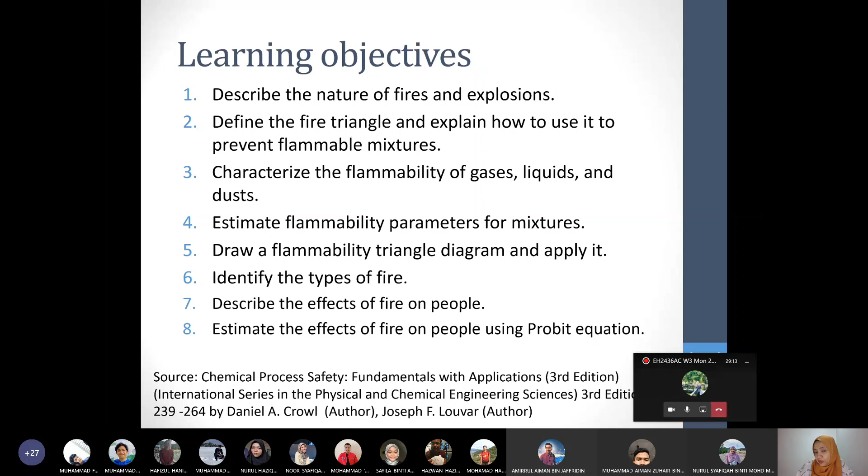We've seen these 3 most common chemical plant accidents: fires, explosions, and toxic release. Toxic release is like the one in Bhopal or Chernobyl. We will be focusing on fires and explosions in this topic, and we've also seen the impacts they can bring to people, properties, the environment, as well as to the business itself. So it impacts all of this.

I want to start with one example, which we can also relate to the domino theory we learned in theories of accident causation. The story about Mumbai High North is that this oil platform, the whole thing was gone in 2 hours. This explosion and fire destroyed the whole platform so quickly. The main reason it all started was a cook in the kitchen on the vessel, not even on the platform.

On the ship, which is a multi-purpose support vessel, there are kitchens. The cook cut 2 of his fingers and needed medical attention, so he had to go back to the platform and be transferred from the vessel by basket transfer. Somehow that ship hit the risers, causing gas leakage, which finally exploded, and the whole platform was lost.

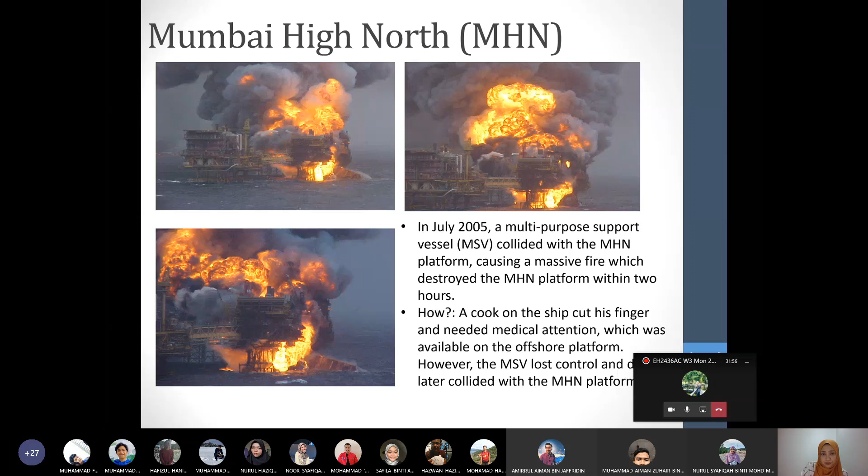This is why it's important for engineers to be equipped with knowledge about fires and explosions. To prevent accidents resulting from these kinds of fires and explosions, you must know the properties of materials. We handle flammable materials such as methane, ethane, butane, all the hydrocarbons, all the alcohols, and other petrochemicals. Those are all flammable, so you need to know the property of the material, such as the flash point, the ignition point and vapor pressure.

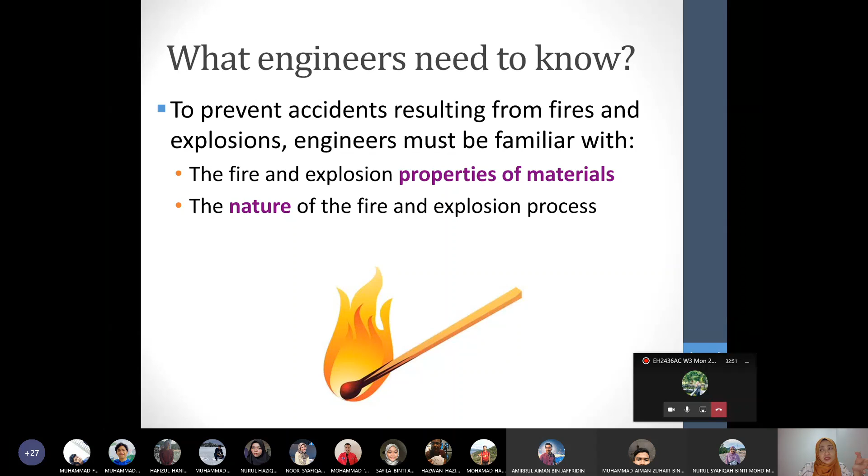Those things are important, and you also need to know the nature of the fire explosion process - how does a fire start, what makes up a fire. It is also important to know how to reduce hazards related to fire and explosion, how to handle or control fire-related accidents by following procedures to reduce hazards.

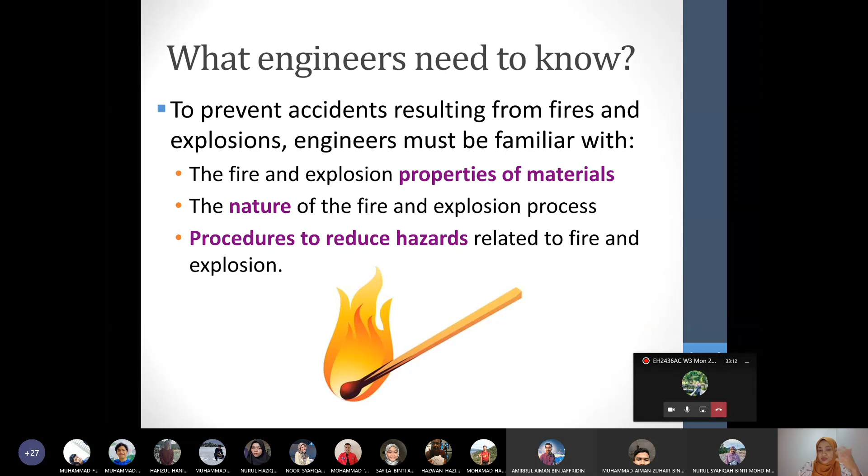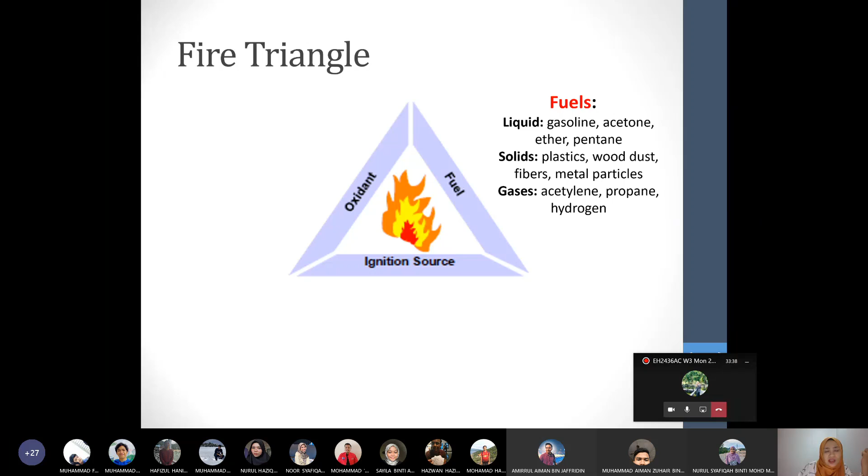Okay, so let's talk about the fire triangle. Now the fire triangle explains that there are 3 elements that must be present in order for fire to occur. So first of all, for you to have fire, you need to have fuel, right? So without fuel, how can you have fire? So you need to have some kind of fuel. It's either a liquid fuel, solid fuel, or gases.

So liquid fuels are like all those hydrocarbons or alcohols, or acetones. Okay. And then there's also solid fuels. Solid fuels can be anything that's flammable. It can be even the table, what we call a wooden table. It can be plastic. Some plastics are flammable. It can even be dust, wood dust, milk powder, even flour. Those are all combustibles. Okay?

Fibers, cloth, metal particles, even those are all flammable. And then gases, yes, gases are also flammable. Acetylene, propane, hydrogen. And then if you only have fuel by itself, safely contained in a container, you won't have any fire. I mean, you cannot ignite any kind of fire from it.

So you need to have an oxidizer, because we know that in order for you to make fire, you need to have a gas such as oxygen. So you blow when you're starting a campfire, right? You need to have enough oxygen for it to start burning. So other gases are also oxidizers such as fluorine and chlorine, and some oxidizers can be liquids like hydrogen peroxide, nitric acid, perchloric acid, and even solids such as metal peroxides and ammonium nitrite.

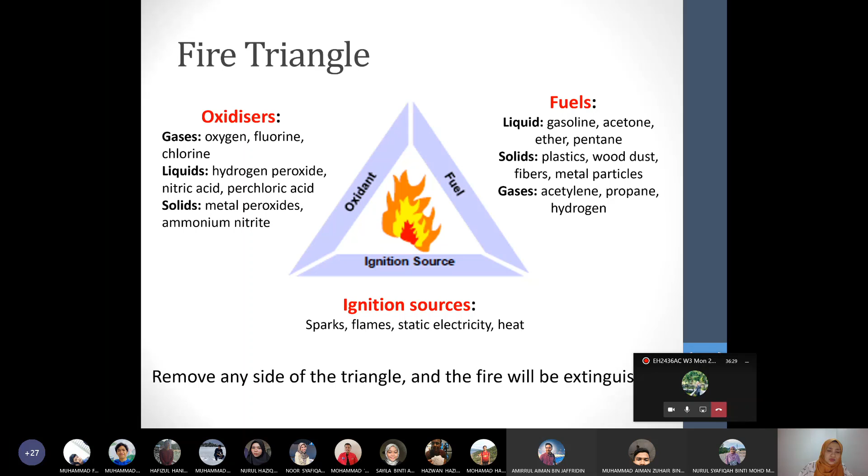So now we know that we have all these elements, right? So in order for you to extinguish a fire, you just have to remove one of the elements. Okay? So you won't have any fire if, for example, you remove the fuel. So you don't have any fuel present, or the fuel is just not in sufficient quantities. You have very little fuel, then you won't have fire. Or you can remove the oxidizer, or it's just that the oxygen is not sufficient enough.

This is like when something's on fire, you put a blanket on it. That's a way of removing the oxygen from that source of fire so that it can be put out or extinguished. And if an ignition source is not energetic enough to initiate the fire, then you won't have any fire, say, the heat is just not high enough, or the spark is just too small, and so on. Okay, so these 3 elements work together. Without one of them, you won't start a fire.

Okay, so that's fire. Now, what about combustion? So combustion really is a chemical reaction in which you have a substance, which is your fuel, and then you combine it with an oxidant, and then you have heat released. So when you have heat released in a chemical reaction, that means it's an exothermic oxidation, and a typical combustion equation would be a fuel or a hydrocarbon plus oxygen.

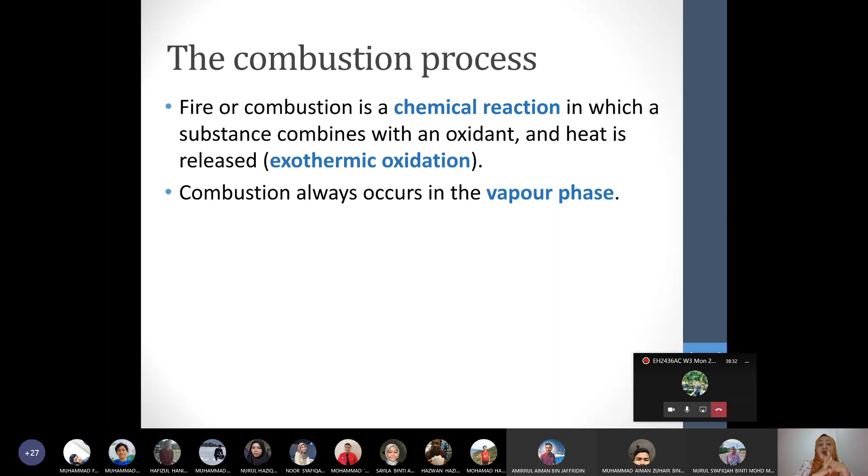In a perfect combustion with enough oxygen, normally you would have CO2, right? And water, if you still remember your combustion equation. So that's what you get. So it's a chemical reaction. Another thing that's important for you to understand is combustion always occurs in the vapor phase. It's always in the vapor phase.

If not, it won't occur. Okay, so this is because when you heat something up, let's say you heat up a flammable liquid, that liquid will volatilize, so it becomes a vapor. It is now in a vapor phase. Or if you burn a solid fuel, for example, that solid fuel decomposes and it also turns into vapor. So you see, it's always in a vapor phase.

So when the concentration of that vapor phase is high enough, that vapor becomes a flammable mixture when mixed with enough oxidant, with the oxygen in the air. Okay. So this flammable mixture already has 2 components. It has the fuel in the vapor phase in the right concentration. It has oxygen also in that vapor phase in the right amount. You just have to add an ignition point. You just put a spark, for example, and the combustion will start.

So that's how you start a fire. So you need to have those 3 elements. One is the fuel in the vapor phase, and then it's mixed with enough oxygen. Together it becomes a flammable mixture, and then just add an ignition point, and you start the fire.

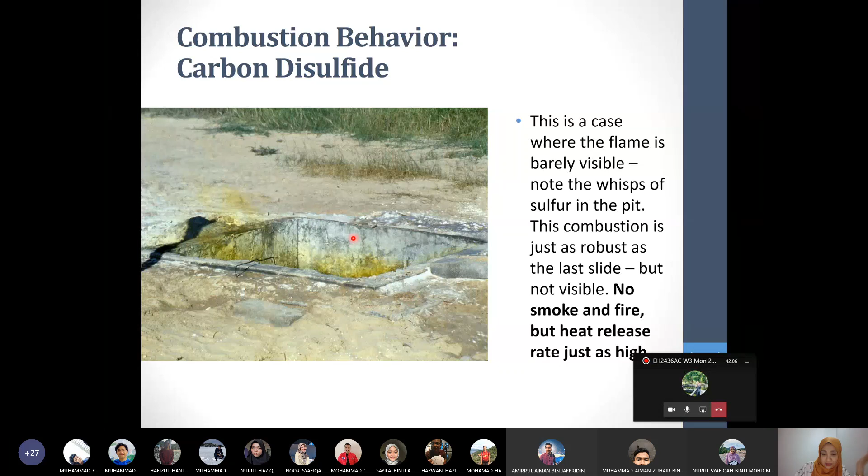Okay. This combustion is just as intense, just as robust as the previous hydrocarbon combustion. It's just that it's not visible to the eyes. You don't see the fire, you don't see any smoke. Okay? But the amount of heat being released from the exothermic reaction is just as high as the typical hydrocarbon combustion.

All right, another type of combustion behavior is this example. Let's say you have methane burning within a vessel. You have a closed vessel, this one is a dust filter unit. Okay? So it's in a covered vessel burning the dust, and due to pressure buildup, it starts to shoot out of the building. It looks for the weak spots in the structure, and you have this projection of fire going out of that containment unit or tank.

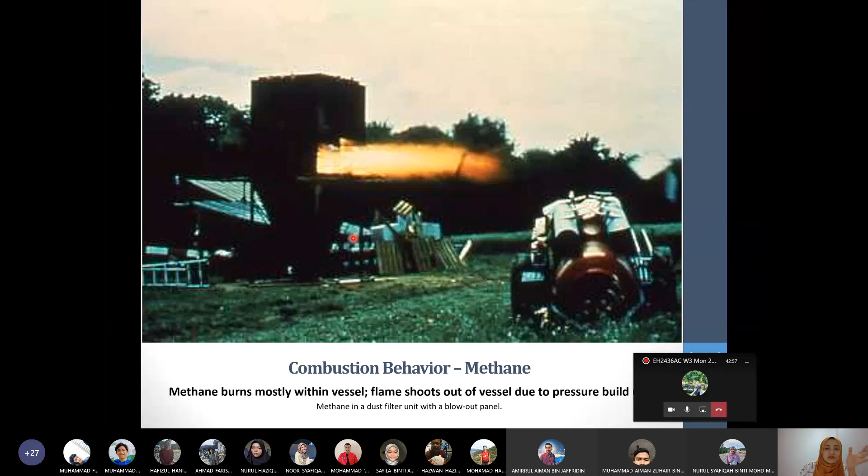Okay? So this is one behavior of combustion where you have this jet-like propulsion of fire going out of the source. And another behavior of combustion: again, you can have a combustion in air with dust. This is in the air. It's just like the previous slide where you have combustion going on in this vessel. I think this looks like a cyclone. If you remember what a cyclone does, it removes the dust particles.

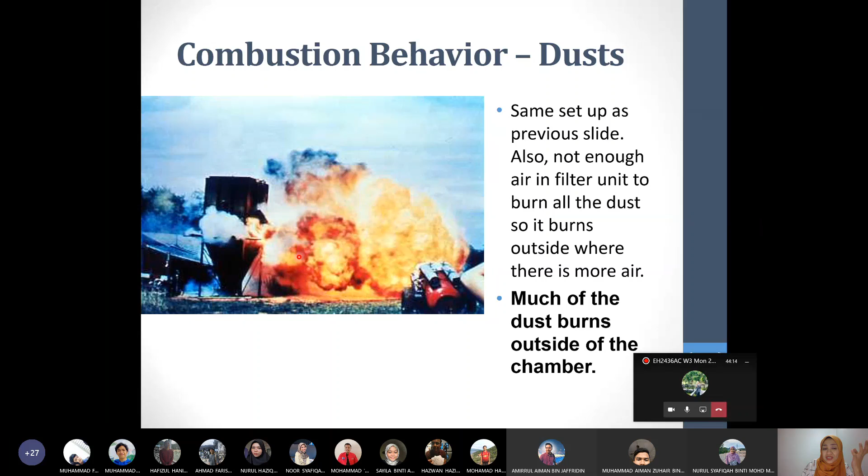So the combustion probably started inside the cyclone, and due to the lack of oxygen, but the fire still being intense, it's trying to look for oxygen. So it escaped this vessel and tries to find the oxygen outside of that vessel. So it's now burning outside because there's more air. Okay? But much of the dust is burning outside of the chamber. It's just that the explosion or fire continued outside of this vessel because it can find enough air. And so this is the behavior of fire, because fires move.

Okay, so I've been talking about fires and explosions. What's really the difference between fires and explosions? We always say that fire is a friend, right? We need fire. We need it to cook. We need it for heat. As long as we can control that fire, it's beneficial to us. If the fire becomes uncontrollable, then you can have an explosion. So you see, the difference is how you control something.

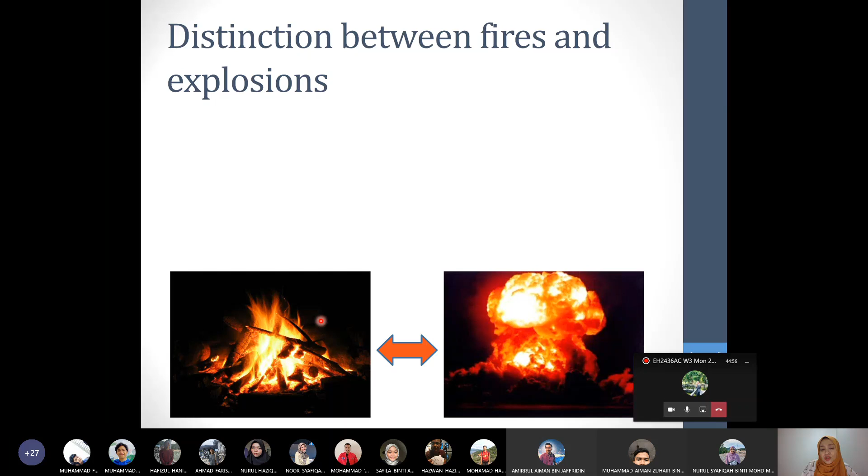What is it? You control the reaction. You control the amount of heat that's released. So you see, the major distinction is the rate of the energy release. For fires, it can take a while for a fire to start. But an explosion can start in seconds, even microseconds. Okay. So fire releases energy slowly, whereas an explosion releases energy rapidly, in the order of microseconds. It's just like that, you can have a fire.

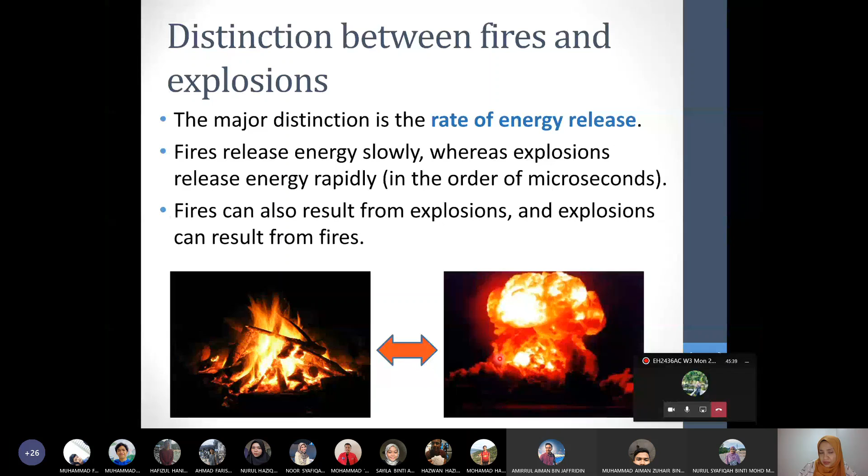And then fires can also result from explosions, and explosion can result from fire. So there, see, if you can control it, it can go back to fire, or if it is uncontrollable, it explodes.

So now let's look at some definitions related to this topic. First of all, we've gone through combustion. Combustion is a chemical reaction in which a substance, which is a fuel, combines with an oxidant, the easiest one being oxygen, and then it releases energy in an exothermic reaction, and part of the energy is used to sustain that reaction.

Ignition is caused by a flammable mixture coming in contact with a source of ignition with sufficient energy. Like I said just now, you have a flammable mixture. You have this thing that you use to start a fire, the spark gun thing, so that you can start a spark and ignite the fire if it has enough energy.

Auto ignition is another interesting definition. Auto ignition temperature is the temperature above which adequate energy is available in the environment to provide an ignition source. This is when you don't need that spark gun to start a fire. If you have a flammable mixture that is concentrated enough, and the environment is also hot enough, it has so much energy in the air, it can start a fire.

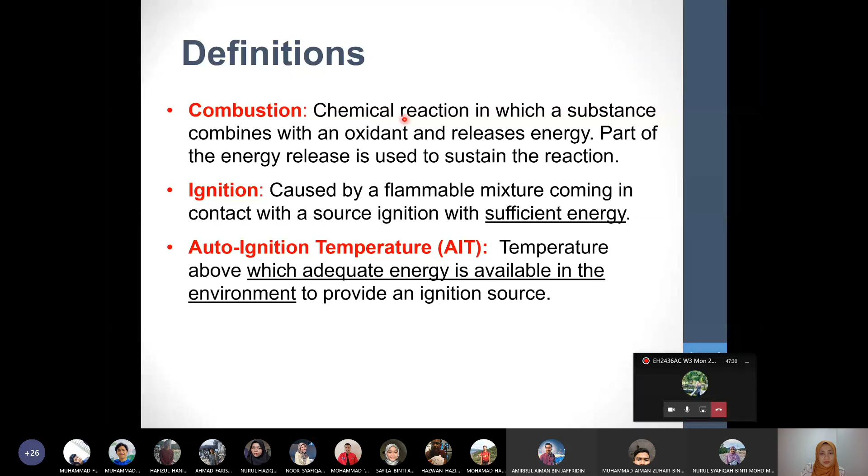Okay, so two more definitions that are important: flash point and fire point. We always hear this. Flash point is the temperature above which a liquid produces enough vapor to form an ignitable mixture with air. So the liquid is producing enough vapor for it to become flammable, okay? With it mixing with air. And this is only for liquids at 1 atmospheric pressure.

So just a little bit above the flash point temperature, you have the fire point. The fire point is the lowest temperature at which the vapor above the liquid will continue to burn once it's ignited. So it's usually higher than the flash point.

So first you have the liquid, it volatilizes, producing this vapor, and that vapor is concentrated enough and mixed with air, then it reaches a flash point, where it can have a first flash, but that flash will not continue burning. It's just a flash. But once you heat it up a little bit more, then that flash will continue to burn. So that is the fire point.

Okay. Are you confused between flash point, fire point, and auto ignition? No, doctor. Okay, everybody okay?

Good. All right. Anyways, just to strengthen your understanding, this is a good video to watch. Oh my gosh, where? Okay, my pointer cannot click on this. All right, there it is. Let's go to this YouTube video and see. I hope I put the audio on.

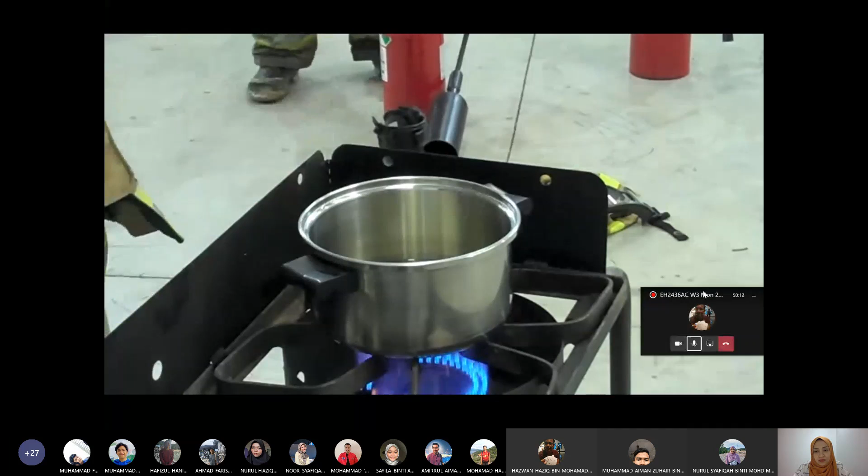Every few minutes, just pop that and see what temperature the fuel is. Canola oil inside, 184. What we've got, canola oil in a pot, and just to demonstrate, got a lighter. I can put the flame directly on the oil surface. It's not going to catch on fire, reason being, it's just not hot enough. We're not giving off the amounts of flammable vapors required. I can go straight down to the bottom surface of the grease, and we've still got nothing.

All right, I'm starting to see some smoke coming off the top. Now, the concept being that the smoke will burn, but not yet. Start seeing the smoky stuff coming off. That's what we're talking about with vaporization; it's pyrolysis when dealing with the solid, vaporization with the liquid.

At this point, we're not quite there yet, but we're getting a lot closer. 560. See, the fire won't start. It's not hot enough. Yes, hot. And then it's the Thanksgiving fire.

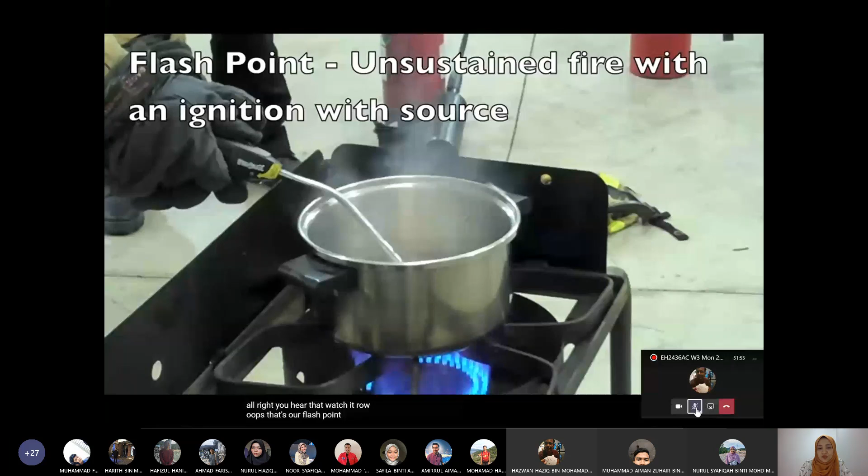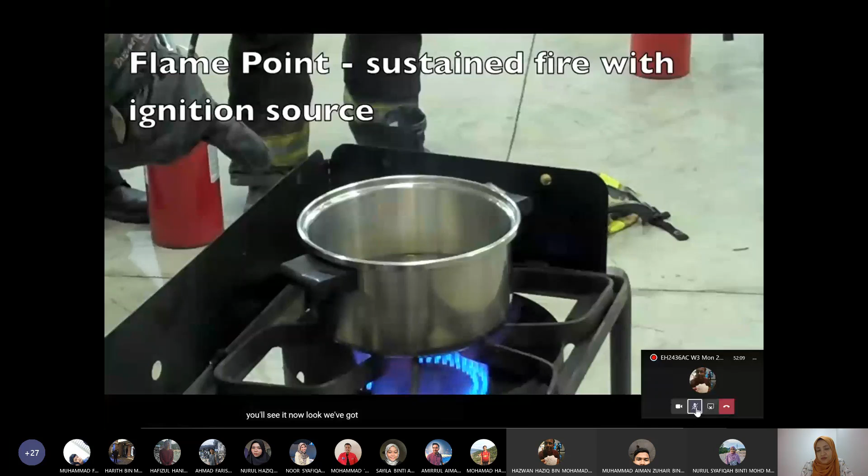All right, you hear that? Watch it. Oops. That's our flash point. That's our flash point. Now watch, I'll get it to 630. Y'all see it? Yes. Now look, we've got active flames. So we already went from our flash point to our flame point. This is our flame point, but if I put it out, cover it up, it stays out. We keep on heating this up though.

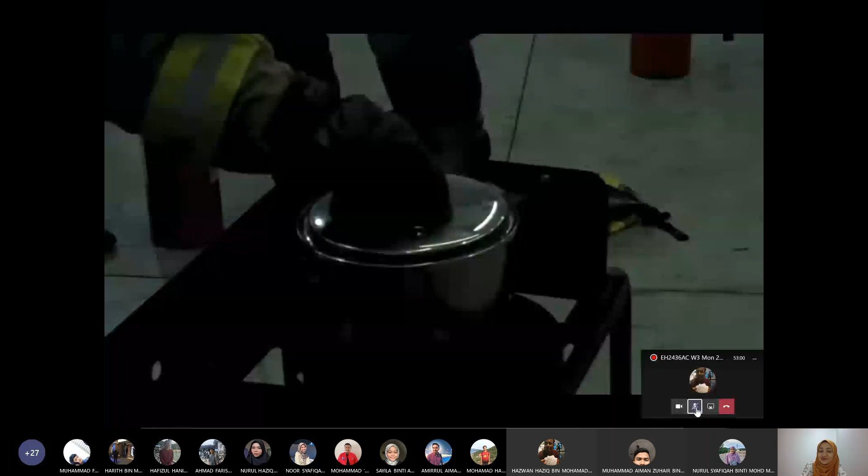That's our flame point. What do we want to keep doing at this point? That's our auto ignition temperature. At this point, we can cut the supply off, but it's hot enough, even without a direct flame, where it'll catch on fire all by itself, and it's turbulent, it's moving around, it's trying to get going. And the idea is, that's pretty sweet, it's going to take a long time to cool off.

So give it just from a far distance. Everybody step back now. Let's put it out from where you're at. Not at my camera. All right, don't splatter it out. Thank you. Hey, Jason, you got it too hot. So everybody get the difference now? Just like every time we learn something pretty hot, really hot. Somebody always wants a break.

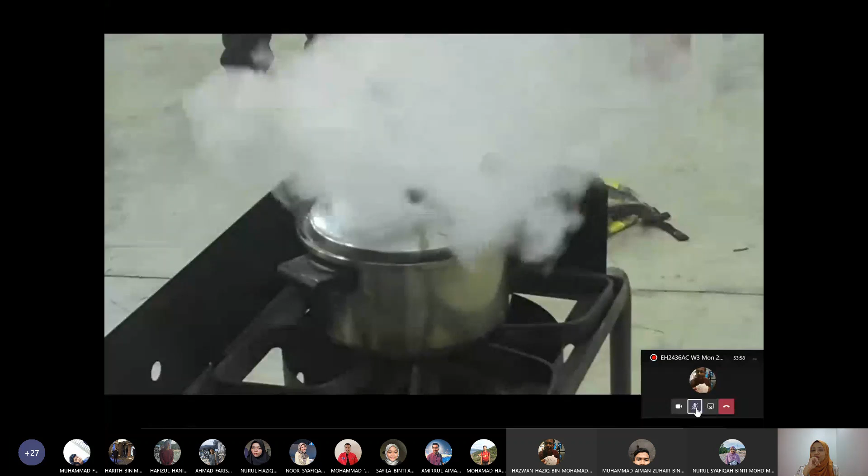All right. So that was the video that explains the difference between the flash point, the fire point, and the auto ignition. So was that a good video to watch? Yes. Yes, it was.

Okay, so you can see that the fuel that they used in this example wasn't really a hydrocarbon. It was just an ordinary canola oil, a cooking oil. So this is why it can be dangerous if, let's say, you accidentally heat up an oil just to fry something and you forgot to turn it off. It can catch fire because of the vapor that's produced above that oil. If it's high enough, it can get to auto ignition. So that's how fire starts in people's kitchens, for example. All right, next.

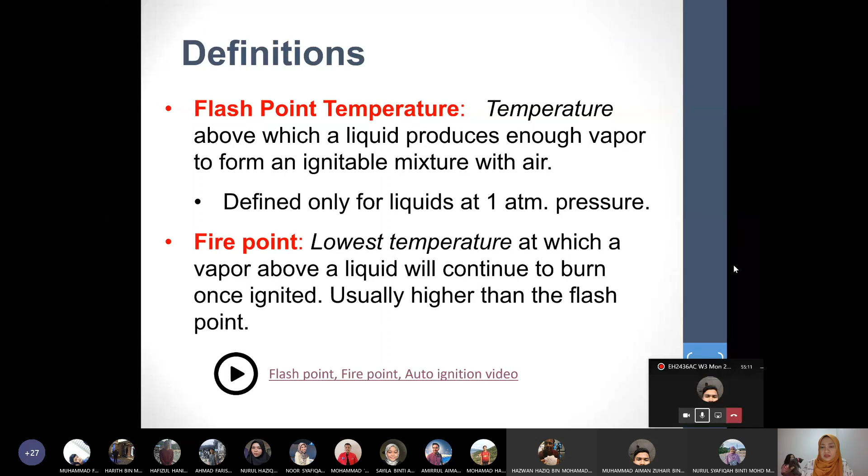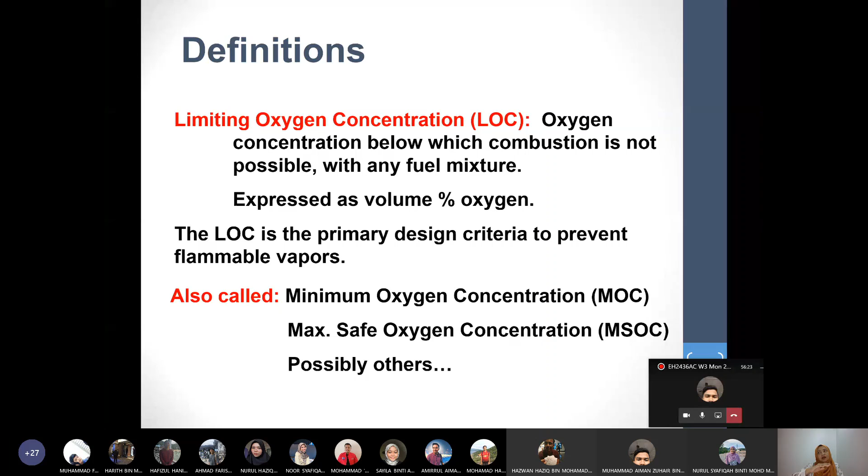Sometimes they also call it by different names. Some books call it minimum oxygen concentration. Some people call it maximum safe oxygen concentration, and there could be many other variations. So it just means that's the minimum concentration of oxygen below which combustion will not occur.

Okay, so more terms. We have LFL and UFL. LFL is the lower flammability limit, and below LFL, the mixture will not burn because it is too lean. And then there's the upper flammability limit. Above the UFL, the mixture will not burn because it is too rich.

Okay, sorry about that because my daughter's here, but ignore her.

Okay, so we'll look more at this LFL and UFL. We'll see what it is. I'll explain it later in the next slide, because this slide is a bit boring.

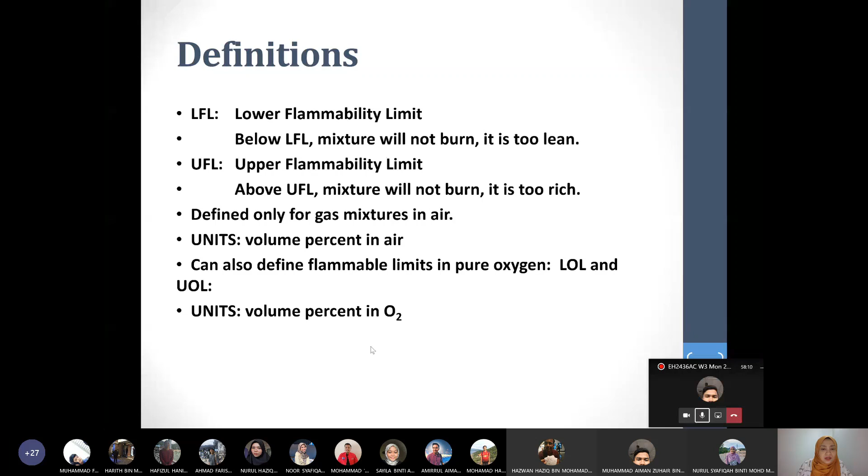So the LFL and UFL are defined by the volume percent of that fuel in air. Flammable limits can also be defined in pure oxygen. In pure oxygen, they call it LOL or UOL, or sometimes LFL with a small O at the end, or UFL with a small O at the end. Sometimes they call it LOL, but LOL nowadays just means laugh out loud, so it's kind of weird to use that now. Okay, next slide.

All right, so let me now explain UFL and LFL. Let's take ethanol as an example. Ethanol has a lower flammability limit of 3.3% by volume, meaning that if the ratio of ethanol vapor to air is less than 3.3%, that vapor will not ignite, meaning the vapor is too lean, too little ethanol vapor in the air. So if you start a fire, it won't start because it's just too lean. You don't have enough ethanol vapor in the air. So 3.3% is the limit. At 3.3% it will ignite, but less than that it will not ignite.

So if you increase the concentration of the vapor further, it will be flammable up to 19%. So 19% is the upper flammable limit, UFL, for ethanol. If you increase the volume percent of ethanol in air to 20%, for example, 30% or 40%, you won't have any fire occurring either. This is because the ethanol vapor is just too rich. It has too much vapor, but not enough oxygen, so therefore it won't ignite.

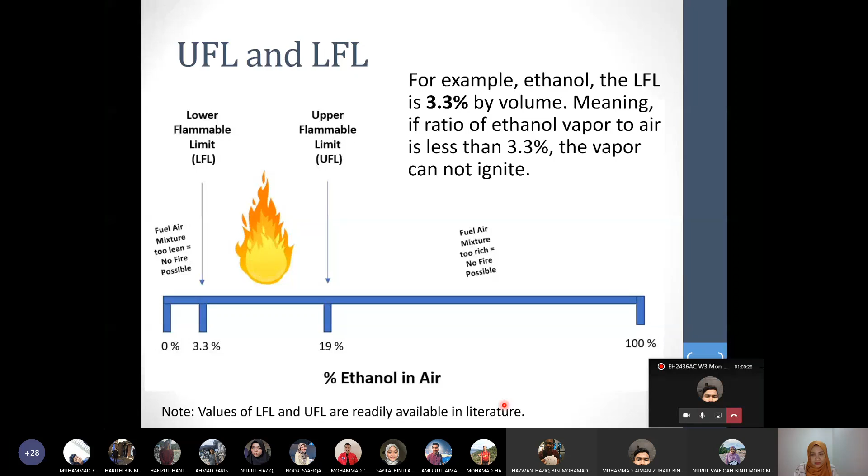All right, so now let's talk about flammability relationships. Flammability relationships can be described in a vapor pressure or vapor concentration versus temperature graph. As you increase the temperature for a certain compound, let's just say methane, the physical condition of that methane will change from liquid to gas, right? Because it becomes more volatile as you heat it up.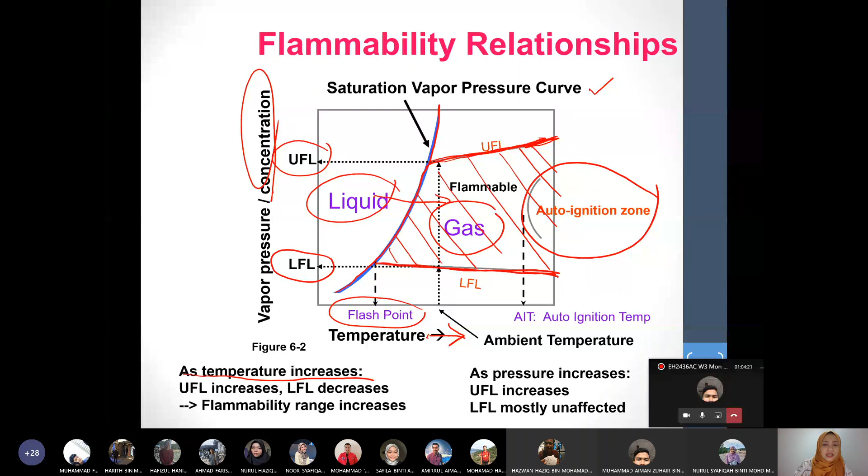And you will realize if you see this UFL line, it's an ascending line, going up. The LFL is going down a little bit, but the slope is not as big as the one for UFL. As you increase the temperature, you can see that the UFL increases and the LFL decreases. So that means that the flammability range also increases, right? This area here becomes bigger as the temperature increases.

If we look at pressure, as the pressure increases, you also see that the UFL increases, but not much in the LFL. So this is the basic concept of what we call flammability. It's a relationship between temperature and concentration.

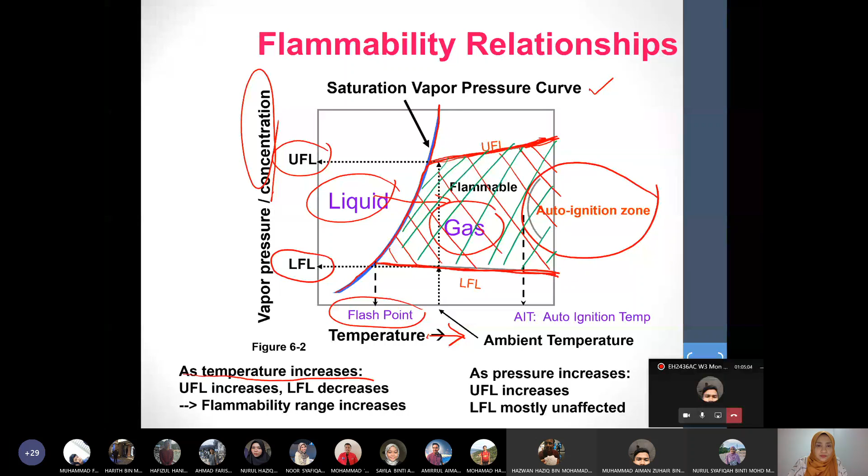So all of these flammability limits, the UFL and the LFL, for all of these vapors like we saw just now for ethanol, are actually determined experimentally. They did it in a lab, and then they published it in data tables in books. But if you have a mixture, let's say ethanol plus methane plus hexane, then the LFL and UFL change because it's a mixture. And you can compute the LFL and UFL of that mixture using Le Chatelier's equation.

So Le Chatelier's equation to compute the LFL of the mixture is 1 over the summation of the mole fraction of component i on a combustible basis, divided by the LFL of that component. Let's say you have one component like methane. What is the mole fraction of methane? Divide by the LFL of methane.

And then you sum it with the second component. Let's say you have ethanol. What's the mole fraction of the ethanol? Divide by the LFL of the ethanol. And so on. You sum all of the components, and this N is the number of combustible species in that mixture. Same thing for the UFL of the mixture: instead of LFL down here, it becomes UFL. And that is how you calculate the UFL and LFL of a mixture.

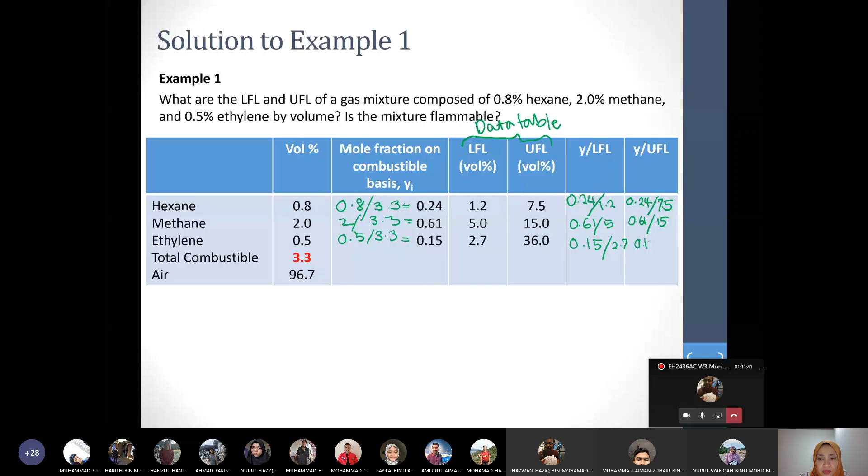So let's do this and find the values. This would be 0.61 divided by 5 for number two, and for number three, 0.15 divided by 2.7. Then 0.15 divided by 36. Let's find all the values.

Once you have all of the values, you sum it up because you want to find the summation. Now, can somebody tell me what's the value here? 0.378, okay, 0.38. And the next one is for UFL.

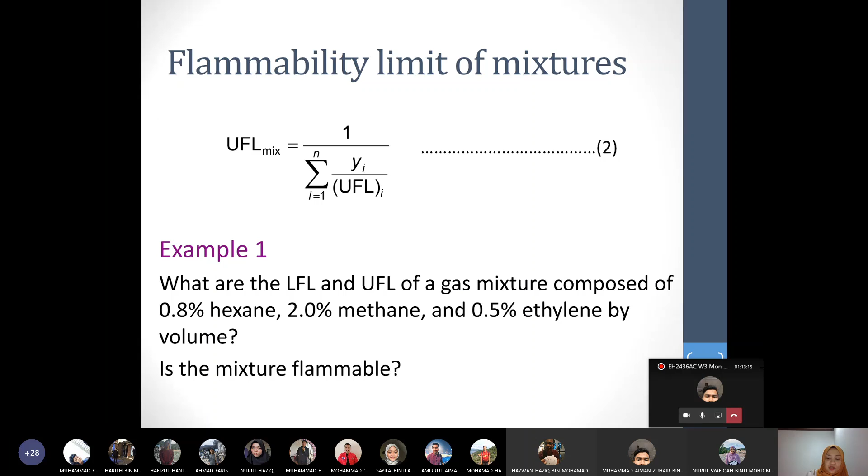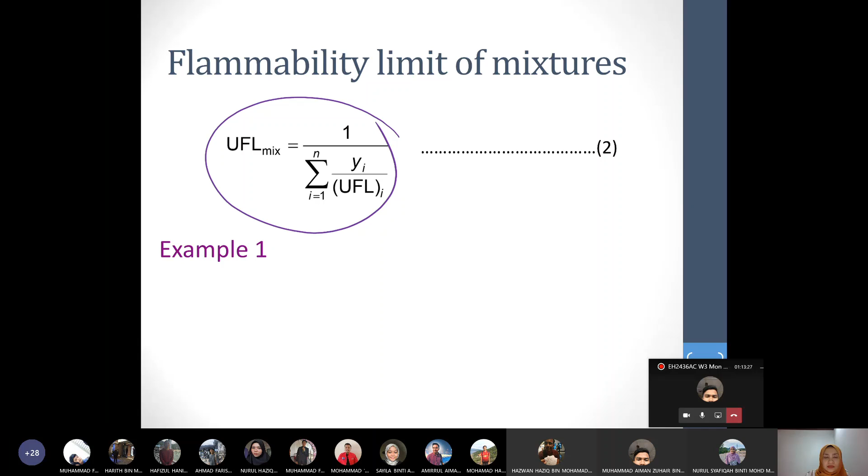0.077, okay, good job. Now if you go back to that equation, remember it's for UFL and LFL, and it's the reciprocal, 1 over that value. Therefore, the LFL is 1 over 0.38, and the UFL is 1 over 0.077. What do you get? 2.645, so 2.64. And the UFL is 13%.

So this is the LFL of this mixture, and this is the UFL of this mixture. So how do we know? The next question is, now that we found the LFL and UFL, is the mixture flammable? How do we know if this mixture is flammable or not? It needs to be below the UFL and above the LFL.

So is this mixture flammable? This mixture has 0.8% hexane, 2% methane, and 0.5% ethylene. Let's look at the total combustible percent, which is 3.3%. So 3.3% lies between 2.64 and 13%, which means it is combustible, making it flammable.

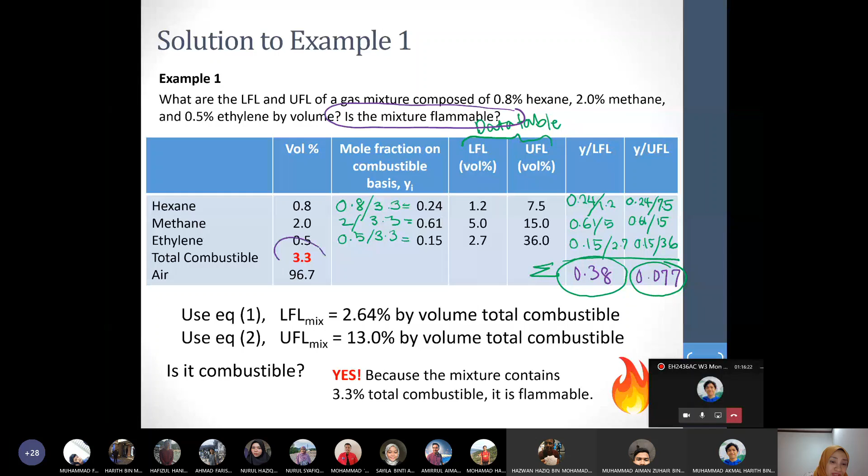Doctor, if the value is not between the UFL and LFL? Then it's not combustible. If, let's say, the total volume here is 2% or 1%, that means the amount of vapor is just too low for it to start combustion. It's not enough — you need to have at least 2.64%, the minimum amount of vapor that has to be present for it to become combustible.

On the other hand, if the total combustible is very high, let's say 90% combustible material, almost all of it is vaporized fuel, but your air here is just 10%. Then it would also not become combustible, because you have too much fuel — it's too rich, and you don't have enough air. Then it won't be flammable.

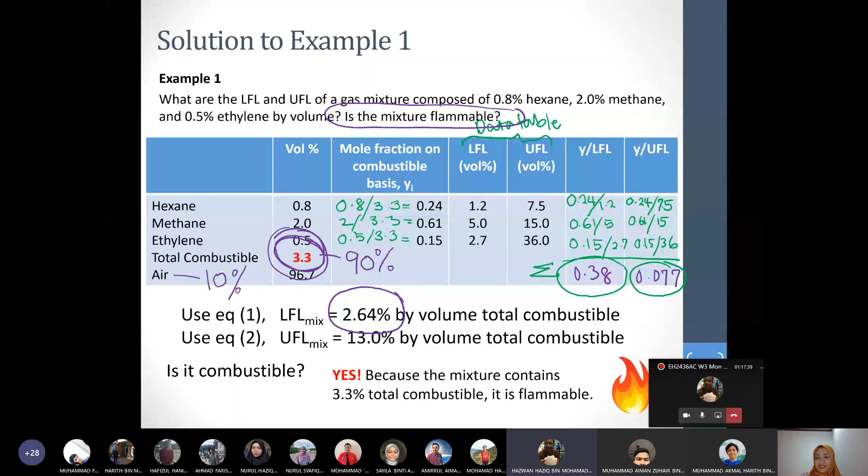Okay, so next, let's recall the concept we just saw, the graph between vapor pressure or concentration and temperature. Remember, we had this graph where this is liquid and this becomes gas, and then you have the upper flammability limit and the lower flammability limit.

It says that as temperature increases, this also increases, so the UFL also increases. That's why all the LFL and UFL values we've seen are at 25 degrees C. At a different temperature, that value changes. If it's higher than 25 degrees C, you get a higher UFL, and for LFL, it decreases, becomes lower. So this region here becomes bigger as temperature increases.

So this is the concept you have to understand: as temperature increases, the UFL will increase and the LFL will decrease also, even though not by much, but still a decrease. Therefore, the flammability range increases, so that zone of flammability increases.

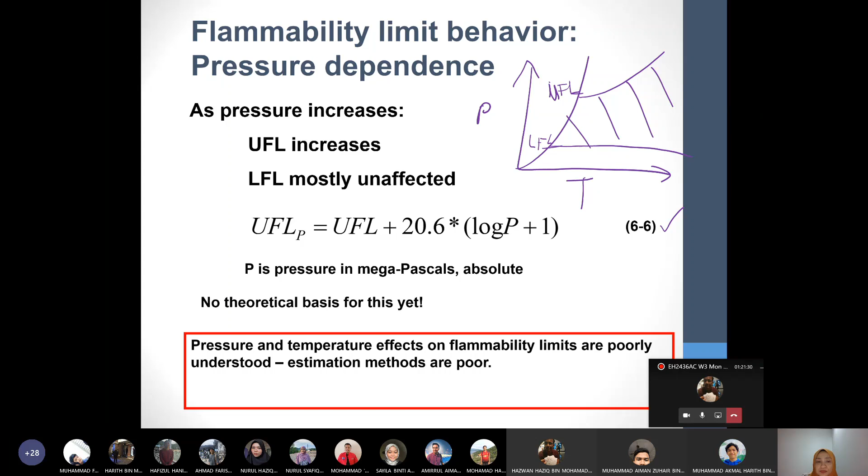Now, more on estimating flammability limits. This is another way to estimate the LFL and UFL if you do not have a table of data or any experimental data. You can do this using an equation.

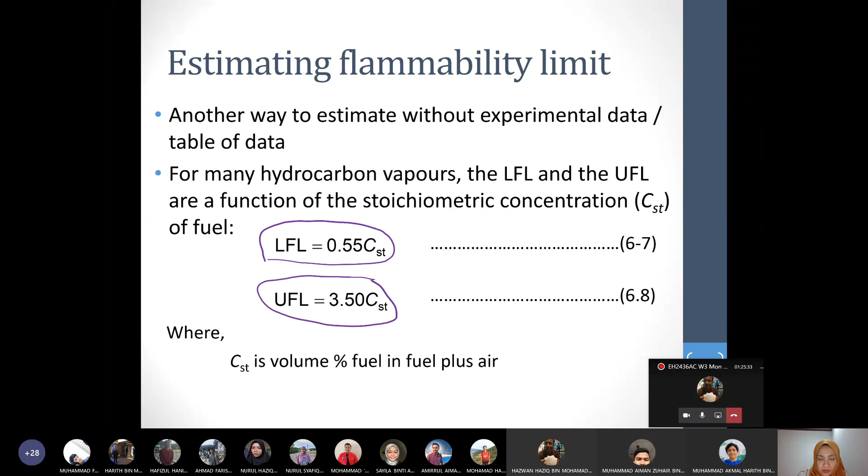And then next, when we have that, we can put this back into equations 6.7 and 6.8. If you remember, LFL is 0.55 times the stoichiometric concentration, and UFL is 3.5 times the stoichiometric concentration. So this is the stoichiometric concentration just now, CST.

And then you put in there 4.76M plus 1.19X. And then you see here this Y, I can cancel it out because hydrocarbons mostly do not have any oxygen.

And you can get it. Yeah, right. So the CST is basically this one here again.

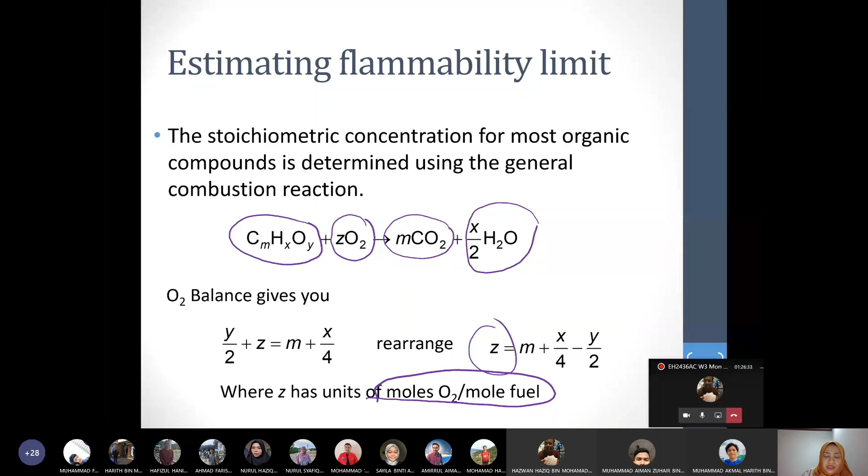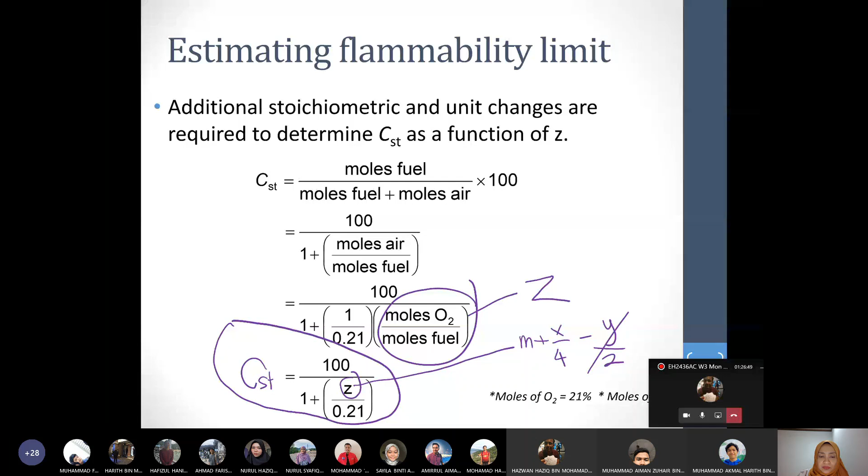So that's actually Z, from here. Z equals M plus X over 4 minus Y over 2. So normally for hydrocarbons, this becomes 0 because you don't have any oxygen. So that's why you have those values.

So let's look at an example. Let's estimate the LFL and UFL for hexane, and then we compare these calculated values with the values available experimentally in data tables. Okay, so we're going to look for the LFL and UFL for hexane.

Okay, so first of all, we write down the stoichiometry of hexane combustion. Hexane is C6H14. C6H14 plus Z amount of oxygen will give you M moles of carbon dioxide plus X over 2 moles of water.

So from here, remember the CmHxOy formula, right? So M here is 6, X is 14, and Y is 0.

Okay, so now let's calculate the LFL and UFL using equations 6.10 and 6.11, these equations here. So we use these equations, just put in the values. You can try. Okay, let's calculate.